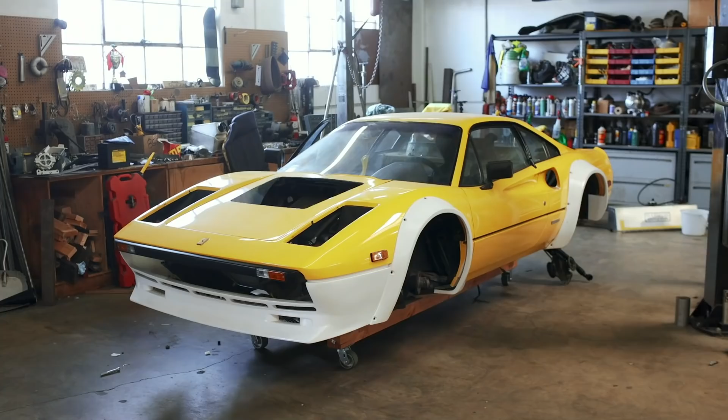They say that the last 10% of a build can take 90% of the time. And they're right, but honestly, I think the same can be said for pretty much any smaller job as part of a bigger project. Right now, I'm working diligently to get the Honda-swapped Ferrari fired up for the very first time, and in the last episode I said we finally have all the parts and pieces needed to pull that off. But if you look behind me, this car is currently more taken apart than it has ever been at any point in the last year.

So how close are we really? Well, the good news for everybody that's been watching through all these episodes is quite close. In this episode, I'm going to be laying out and setting up our chassis harness and chassis electronics because we're going to need those in order to control the engine. And then I'm going to hop into the engine bay and get some final fabrication done so the engine can go in for quote-unquote the last time. So let's get back to it. Let's cross some stuff off the list because I am tired of waiting for this thing to run, and I know you guys are too.

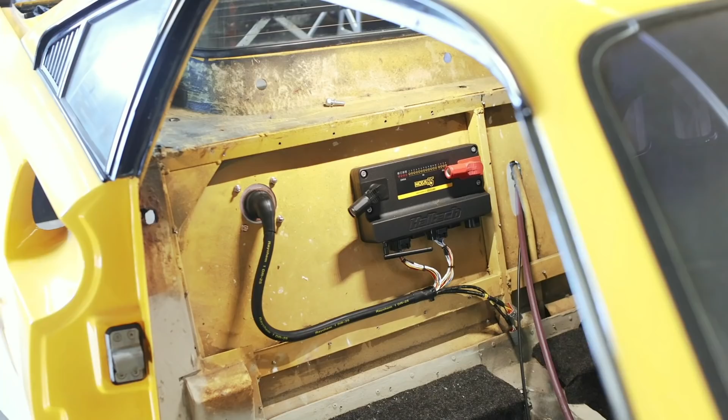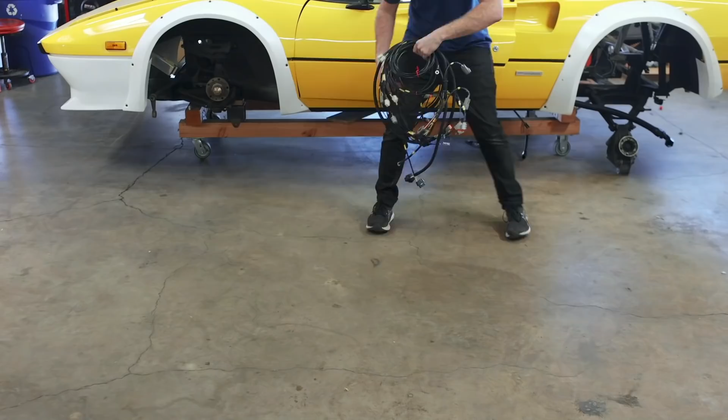With all of the work that we put into the engine bay of the car, I've completely forgotten about all of the things that we have to do inside of the car as well. The last time we were in here, we mounted the Nexus R5 ECU to the rear bulkhead and got some of our wiring laid out in place. But all we had at the time was the engine wiring harness and the sub-harness that connects it to the ECU. In the last episode, I showed you guys the new body harness that we received from Rywire, and I gave a quick rundown on how it's going to work. But now we need to get it laid out and take a look at exactly how we're going to fit it into the car, as there's a lot of wiring here and it only goes in one way.

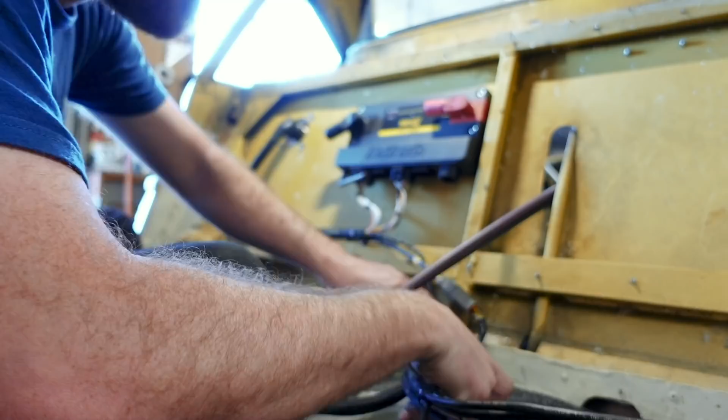Most of it we're not even going to use at the moment. It's for things like headlights and taillights and radiator fans, but a little bit of it is critical for us to fire up the engine for the first time. Primarily, it'll allow us to connect our CAN pad and our digital dash to the ECU, both of which I'd like to have set up the first time we light this thing off. Now, because there's still a lot of interior work left to do, we're really only mocking this harness up so that we can connect the critical components for our first start.

Now, the first piece of equipment that we need to add to the car today is one that we looked at in the previous episode, the Rywire PDM. The reason we're running this is because I have so many electrical components crammed into this car that I don't want to overburden the Nexus R5's internal PDM. And this will give us a lot of expansion and room to run more electrical components than we could have otherwise.

The PDM is getting mounted directly next to the Haltech ECU, and because I don't have a good set of transfer punches, I'm using a paint pen to apply paint to the end of a steel drift and simply pressing it through the holes of the PDM onto the bulkhead to give myself an accurate drill pattern. I'm normally fine with drilling holes a bit oversized if I mess this up, but in this case, I want it to be perfect.

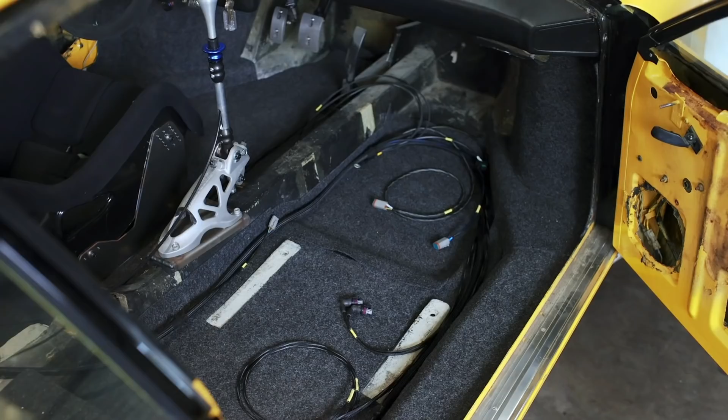The hardware I'm using to bolt in the PDM is only temporary, but we'll touch more upon that later in the episode. With the PDM in place, we've got the major electronics squared away, and I've got the rest of the chassis harness loosely laid out on the car's floor so I can get an idea of where everything needs to go. The next thing we need to locate is our CAN pad.

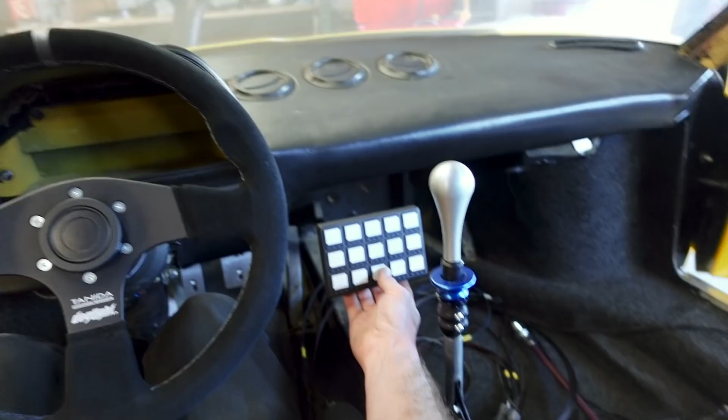This will be the interface through which we control all of the car's functions, everything from headlights and taillights to water pumps and fuel pumps, ignition, and more. And the three lights above each button will also be able to tell us the status of each circuit, so its location is critical. I took this video while I was sitting in the car to get an idea of where exactly I want this CAN pad to sit. The locations are relatively limited, as I need to be able to reach it while I'm strapped completely into my seat with my race harnesses, and I want to be able to see it without having to avert my eyes very far from the road.

I played with a lot of different ideas on where exactly to put it, including right next to me and up above the windshield, but ultimately I think here in front of the shifter makes the most sense, so let's figure out exactly how we should mount it.

The first option is to build some sort of tower structure off of the coolant tunnel that runs through the middle of the car, perhaps something that ties in aesthetically with the shifter base. On the other hand, we could build something from the structure underneath the dash, but there's not much to work with there, and I'm inclined to think that it wouldn't be very sturdy. So, coolant tunnel it is.

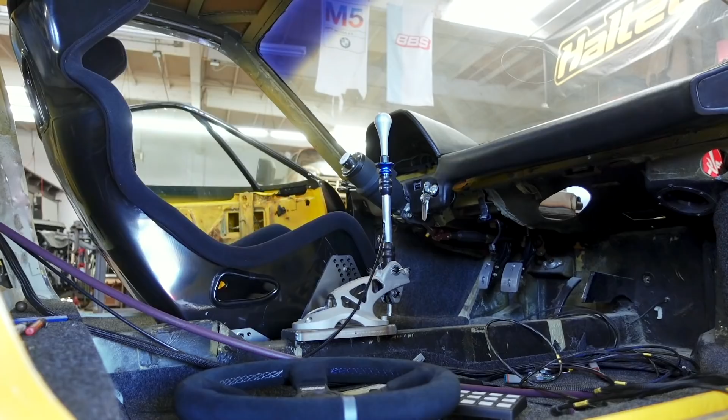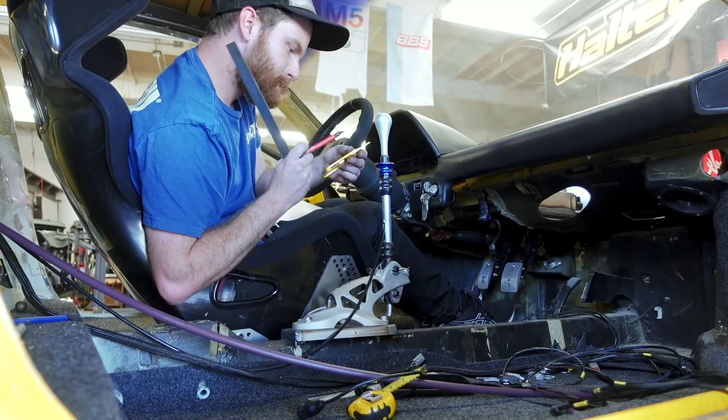I hopped into the car with a tape measure, a protractor, and some calipers, and took a bunch of rudimentary measurements so that I can build something in CAD that can support this panel where I want it to be. I also took some measurements from the back of the CAN pad itself so that we can build a mount that'll hold it, and we're in business.

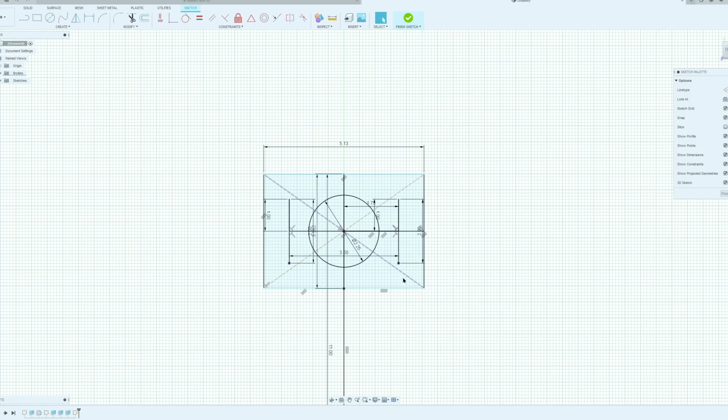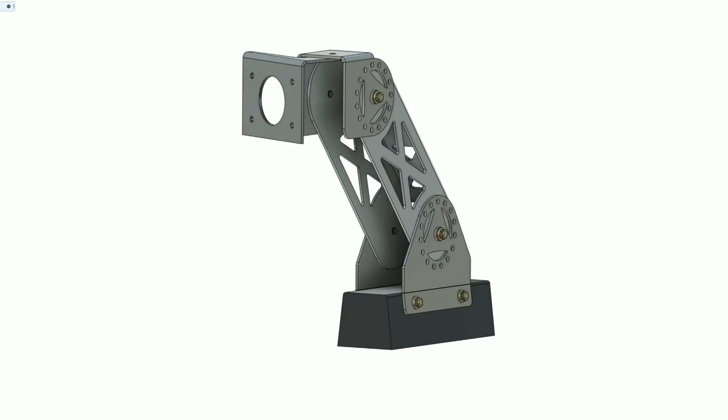I booted up Fusion 360 and got to work drawing something that'll hold this CAN pad where I need it to be. I went through a lot of different revisions, but ultimately, I think I've landed on something like this. Now yes, I did get a little bit carried away on the details of this thing, and I'm going to revise it so it's a bit more tame in its overall aesthetic, but I was having some fun while I was making it.

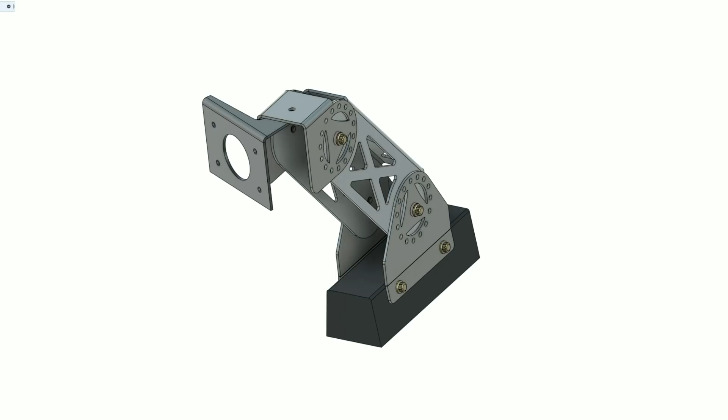The idea is that this can hold the CAN pad where I want it, but it's also adjustable. I don't have to nail the position of it the first time. I can move the pad completely independently on 3 different axes, and I'm pretty excited about that aspect. This should also be pretty simple to make, because I can have the entire thing laser cut out of flat stock by Send Cut Send, and then all that's required is to fold it up and bolt it together. Once I have it in the car and know exactly where I want it, we can make a more permanent fixture.

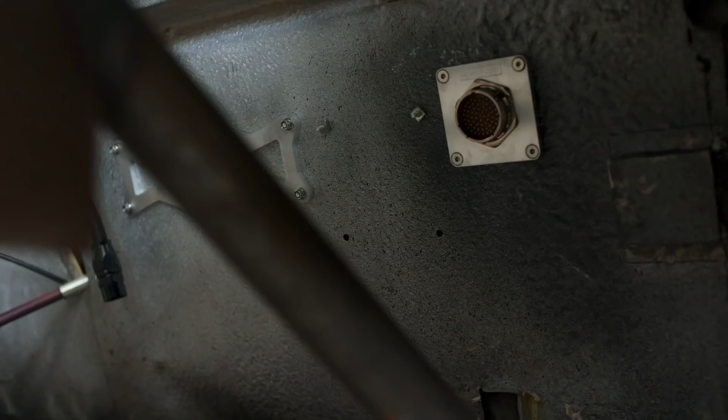One of our last CAD projects was to build an ECU support bracket for the opposite side of the firewall, and today I want to build a similar bracket for our PDM. Ultimately, the goal is to give more structure to the very thin sheet metal that supports it. I want to make sure that I'm using the same design language as the bracket that's right next to it, so I'm basing all of its geometry off of the bracket we made previously.

They're not the same size, so of course they're not identical, but I do think that they should look pretty good sitting side by side on the rear firewall. I'm also likely going to use this same design language when I redraw our CAN pad support mount, but that's for a future episode.

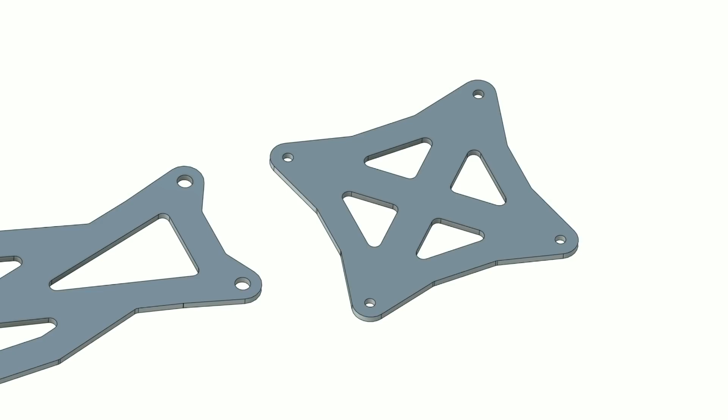It's good to have our electronics installed, but they're all pretty useless without actually having power. So we're going to need to build some battery cables using these Amphenol connectors that come on the Haltech PDM. I'm still waiting on the parts to make the battery mount, but in the meantime we can make the cables. These connectors are pretty cool in that they're a quick release and they look good.

Hidden underneath the cover is the actual lug that needs to be crushed, and normally I would do this with a hammer, but in this case I want something a bit higher end. So I splurged just a little bit and I actually bought a hydraulic tool used for crimping battery connectors and other large gauge terminals.

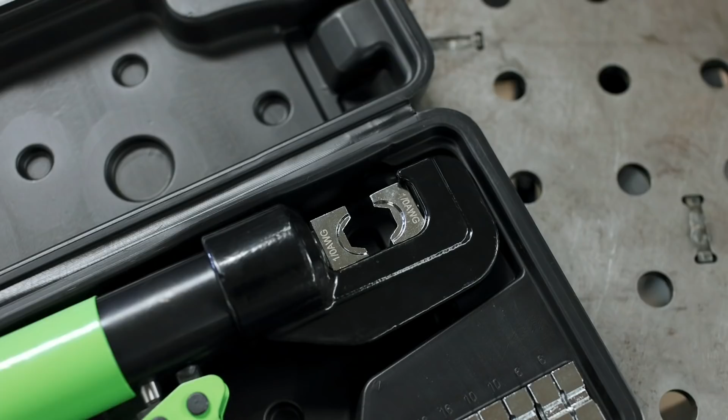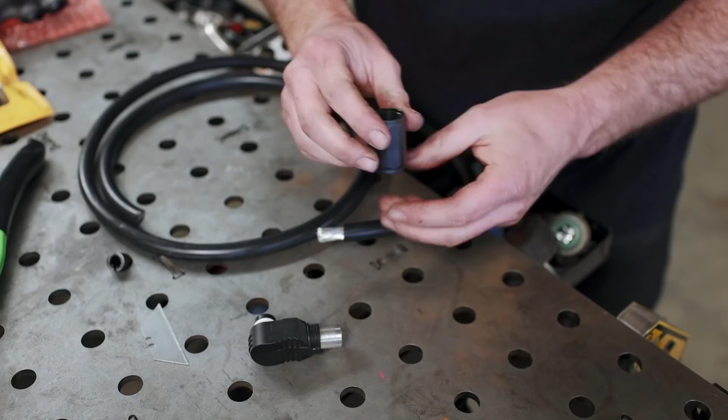And it's got every die you could need to crush pretty much any size terminal, period. What I don't have is a big set of wire strippers, so I'm using a razor blade the good old-fashioned way, but otherwise this process is super straightforward. After a couple of pumps with the tool, we're left with a really nice looking crimp, and it's rather strong to boot, and overall, I'm really happy with the outcome. This tool's going to come in really handy as we finish up our wiring.

Forgive the sound, there's an excavator right outside the shop that has been going all day and it has made it impossible to record anything, and it may start again any second.

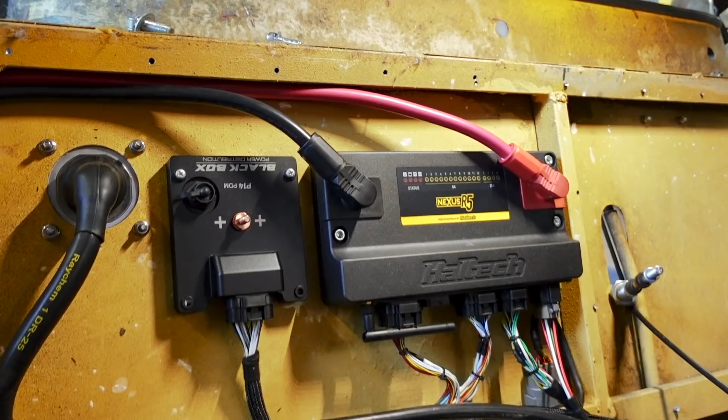But I've got the cables installed on the Nexus R5, and they're simply going to come up, and we're going to add 2 bulkhead terminals right here, one for power and one for ground. The only problem is those aren't here yet because FedEx or UPS dropped the ball, but these will get ring terminals crimped to them, and then we will use those bulkhead connectors to pass through the firewall instead of actually taking the cable and running it through the firewall itself. It should simplify everything, make everything nice and easy to disconnect if we need to, serviceability, and we don't have to worry about the bend radius of this stuff.

Just in time for that excavator.

Now, another thing that we need to do before we put the engine into place is I've got a lot of welding to do. Now, there's a lot of stuff back here. I'm not going to weld all of it. Most of it's just kind of stitched, but most of it also isn't necessary to start the car up. I want to focus on the things that are, such as making sure the engine mounts are solidly welded in and things like that. So let's do some cleanup and get that stuff burned in.

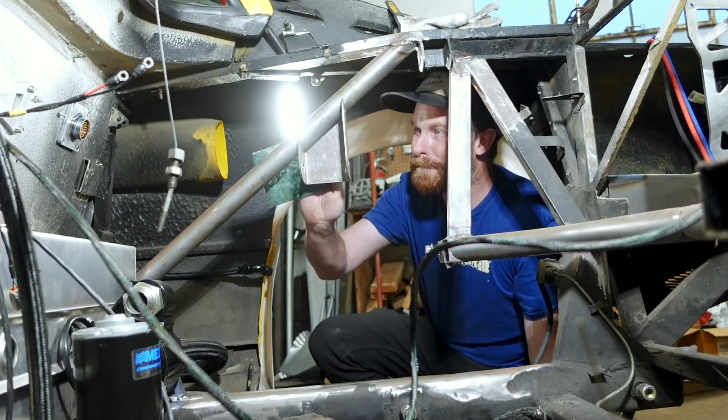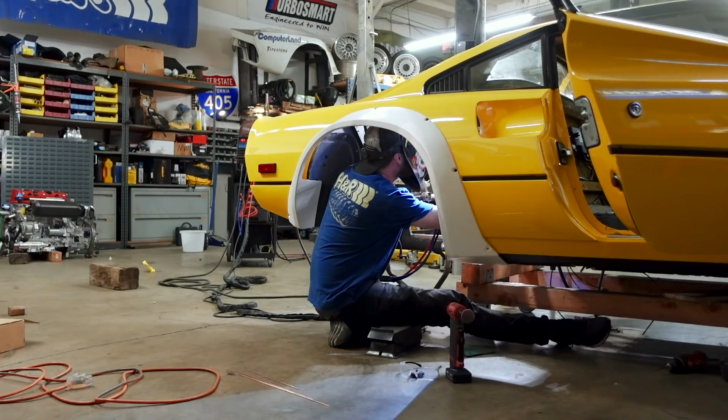Because everything rusts if you let it sit around in this shop, I had to start by cleaning it all up before I settled in for a night of welding. And it needs to be quite clean because I'm set on using the TIG welding process for all of this. That also means this is going to take a while because the TIG process is a slow one. So I cranked the tunes in the shop and got to work.

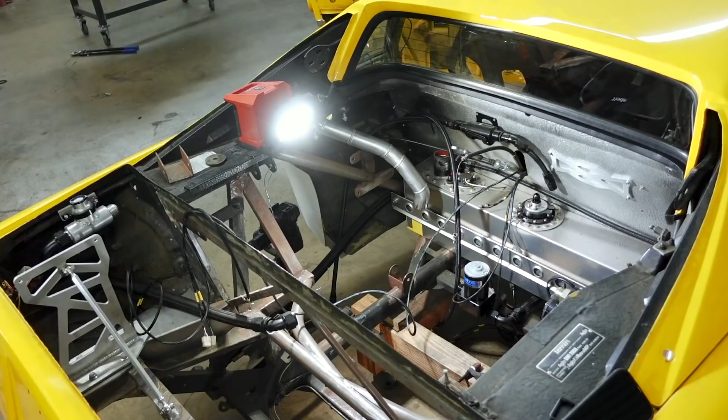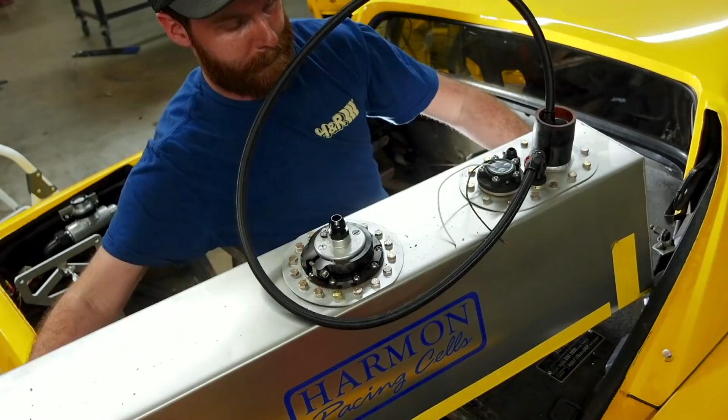Now, I said I only wanted to weld the critical things, but as I got into the evening, I realized that was a dumb decision. I'm definitely not going to want to pull all this stuff out again just to weld things up so that I can drive the car once it does run. So I decided to disassemble it all and pull a late night at the shop.

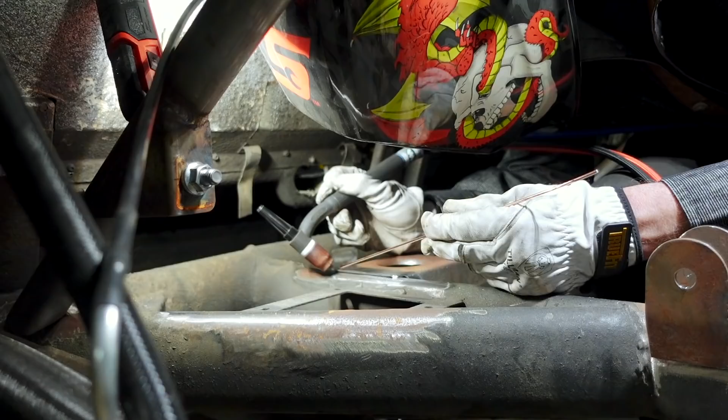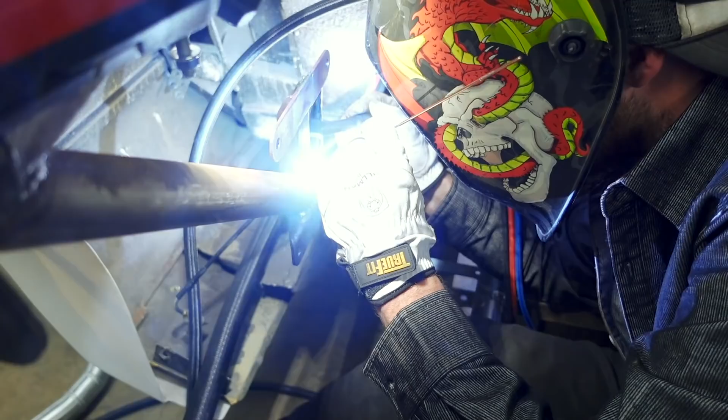As for continuing to use the TIG process, it's for the same reasons I've mentioned before. I want all the practice that I can get. And I know that if I ever want to TIG weld a tube chassis or a roll cage into a car, it's contorting myself into these odd angles that's going to get me there. Learning how to control the pedal with my knee or thigh or even elbow are only going to be learned from situations like these. I can't suggest that this is the right tool for the job, as this entire project would have taken a lot less time if I had simply used the MIG, but I'm happy with my decisions, and I'm always looking to increase the size of my toolbox, both literally and metaphorically.

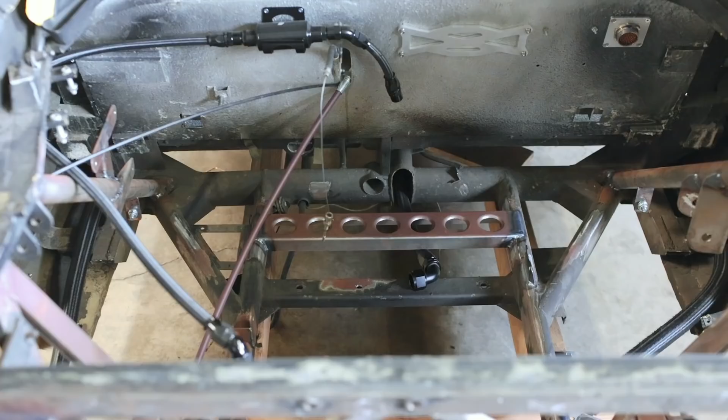All right, it's the next morning. Camera died last night. I decided to just kind of stay in the engine bay and keep welding until pretty late. I think I got home, I don't know, around 11. It was a long day of welding. I even had to get out the MIG welder to get some of those back corners around those down tubes. I'm not quite talented enough with the TIG to get back in there and do it well. But I will say, I really am so much happier and more comfortable using the TIG in a general sense these days. I was bummed to have to get that thing out.

With that said, engine bay is pretty much all welded up. There's a couple of small spots still to get that I can get with the engine in place. Everything that matters and that is structural is done at this point. I feel pretty excited. Now, once we get it running, we can conceivably drive it once we have the running gear on the car as well, instead of having to take it all back apart again.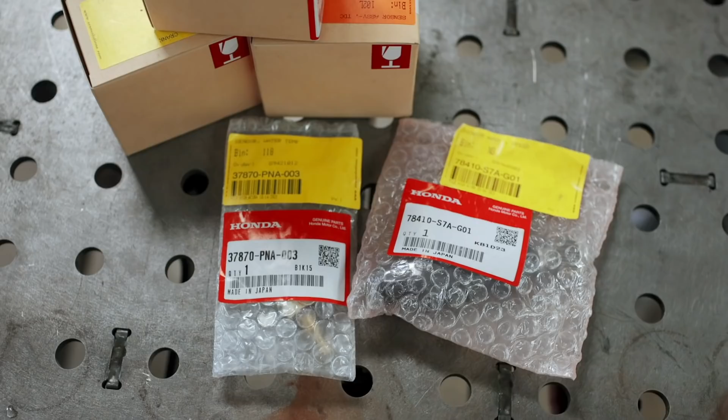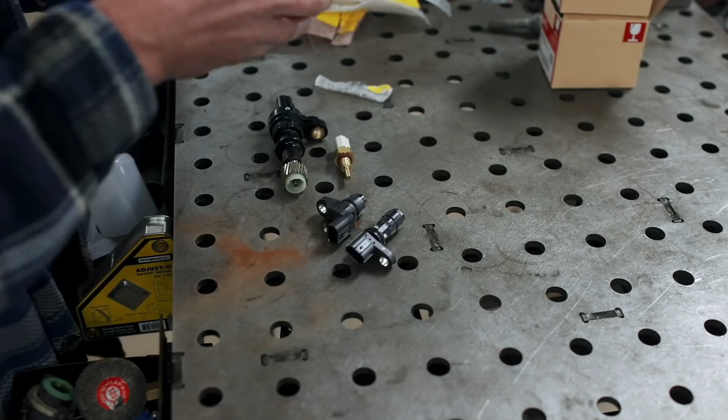All right, next on the list, probably some sensors. Of course, we need sensors to actually run the engine, so I bought a bunch of Honda factory sensors for us to install. Inside, we've got 2 cam position sensors, a crank position sensor, a coolant temperature sensor, and a vehicle speed sensor, all of which the computer is going to look for. For everything else, we'll simply use Haltech sensors or go completely aftermarket.

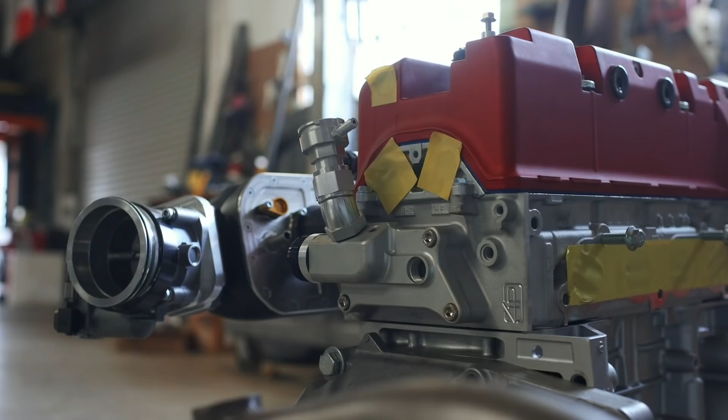But we're off to a bad start because, as you can see, the vehicle speed sensor I bought is the wrong one. It's nowhere close to fitting. Fortunately, we're not driving anywhere yet, and the other sensors are more important. The crank position sensor and both cam position sensors worked out perfectly.

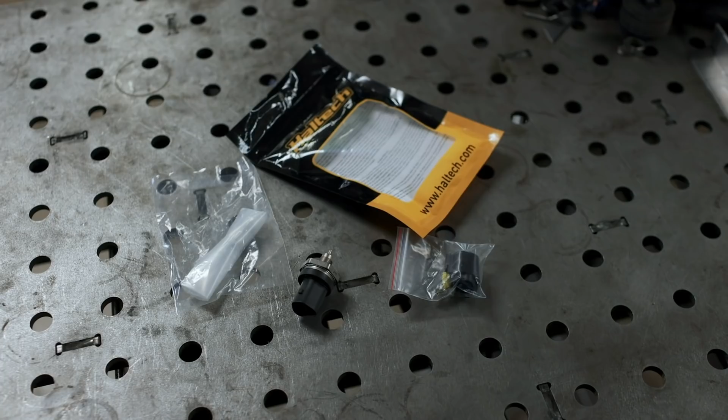And then, of course, there's our engine coolant temp sensor, which is as easy as it gets. As mentioned, there's all sorts of other sensors, such as oil pressure, fuel pressure, temperature sensors, and so on that we're going to need, but all of those will be Haltech sensors that will integrate with the Nexus R5. Otherwise, we should be set for all of our wiring.

All right, so we've got sensors on the engine, and the engine should be ready to go back into the car now, save for needing to install an exhaust and intake manifold gasket, but nothing that should keep us from firing this thing up. So now that we're here at the end of the episode, I want to talk about the actual checklist and timeline for when I want to fire this thing up, because I truly do believe we're pretty much there. The engine will go back in the car. I've got some fittings to make the last 2 remaining oil lines and a fitting to make the last coolant line that I've just been kind of spinning my wheels on for months at this point.

When the engine goes back in, I want to fill it up with fluids. That's the goal for the next episode. Get all of the fittings checked, make sure we're not leaking anything, and get all of the wires hooked up. We have the chassis harness in place. We've got the engine harness ready to go back in. The only other wiring job that we have to finish is the battery cables. That was going to be in this episode. I wanted to have it done, but unfortunately, there are some pieces that just didn't show up.

As mentioned before, I'm waiting on the bulkhead terminals that'll pass through the firewall instead of us having to actually run cable through the firewall itself. That'll be a nice, tidy solution, and I'm waiting on some battery terminals so that we can actually hook to the battery. Both very simple, and we'll be able to knock those out real quick once those parts show up, but they're not here. Thank you, FedEx or UPS. We're going to have our battery box in the next Ferrari episode. We'll get that installed.